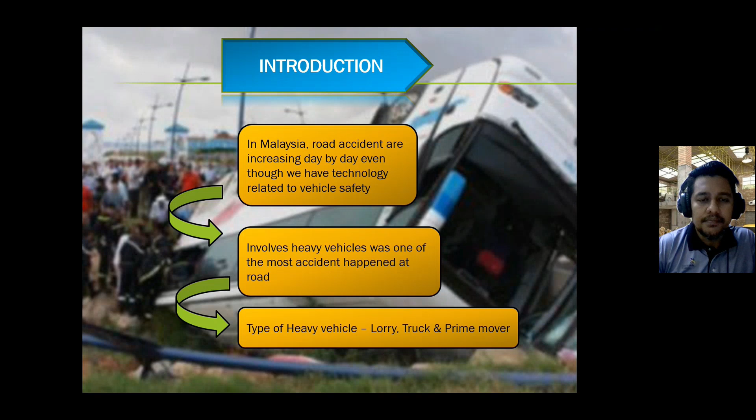This is the statistic, data taken from the Traffic Branch Bukit Aman, showing the total motor vehicles involved in road accidents by type of vehicle in Malaysia from 2007 until 2016. I'm focusing on lorry because lorry is the subject of this research.

Looking at the year 2007, lorries involved in road accidents numbered 47,696. In 2008 the number increased to 48,250, and in 2009 the number decreased to 46,724. The number increased again in 2010 to 50,438, and kept increasing to 53,078 in 2011.

But in 2012, the number of lorries involved in accidents dropped to 42,158, then decreased to 39,276 in 2013, continued to decrease to 37,481 in 2014, and still decreased in 2015 to 34,942. By 2016, the number increased to 35,064.

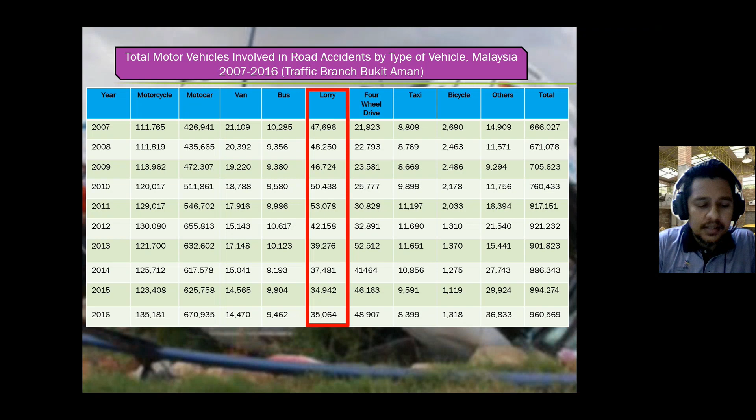This is the data. The data is concerning, and immediate resolution needs to be undertaken.

From Malaysia we go to the worldwide accident report. This source is taken from the University of Michigan Transportation Research Institute and the National Automotive Sample Survey General Estimates System crash database. We look at fatal truck accidents worldwide.

In year 2007, trucks involved in accidents numbered 5,049, with life loss due to the accident at 796. In 2008, trucks involved in accidents numbered 4,352, with life loss of 639. For 2009, trucks involved in accidents numbered 3,450, with life loss of 487. Lastly, in 2010, trucks involved in accidents numbered 3,699, with loss of life at 540.

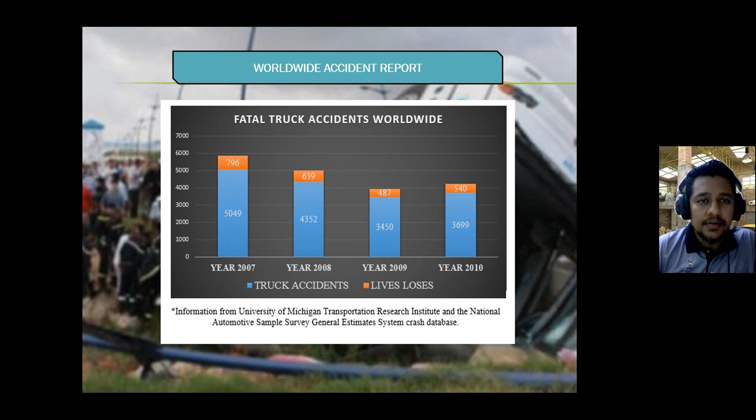This is an example of rollovers that have happened especially in Malaysia. There are four of them, and all of them happened on the highway.

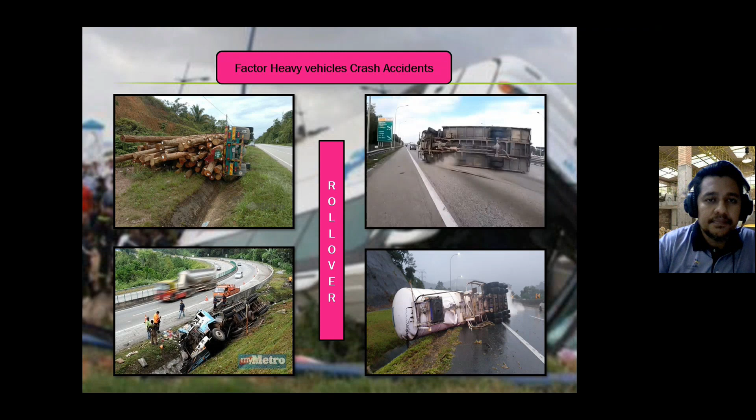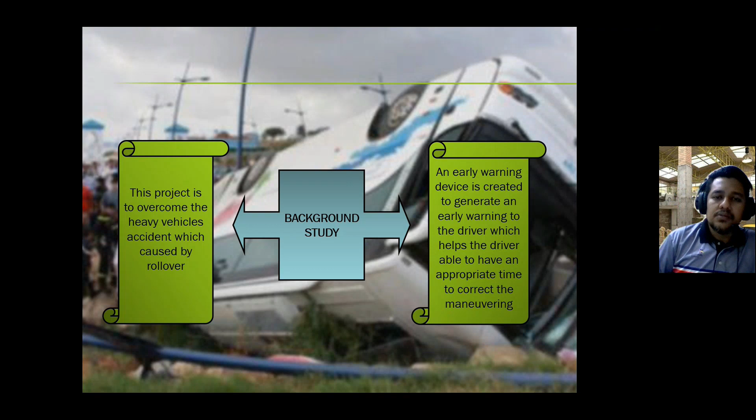The background study: this project is to overcome heavy vehicle accidents caused by rollover. To overcome this, an early warning device is created to generate an early warning to the driver, which helps the driver have an appropriate time to correct the maneuvering.

The problem statement: first we have to know the meaning of rollover. Rollover involves any vehicle rolling over its true longitudinal or lateral axis by 90 degrees or more. Rollover occurs when a vehicle loses control on two wheels and moves to either side. Rollover also occurs when a vehicle collides and flips onto its side or roof.

Still on the problem statement: high vertical profiles such as heavy trucks, SUVs, and buses are at higher risk because this type of vehicle has a high center of gravity. Sudden steering, drastic path changes, or rapid curves at high speed may cause the vehicle's center of gravity to shift to the side and turn over.

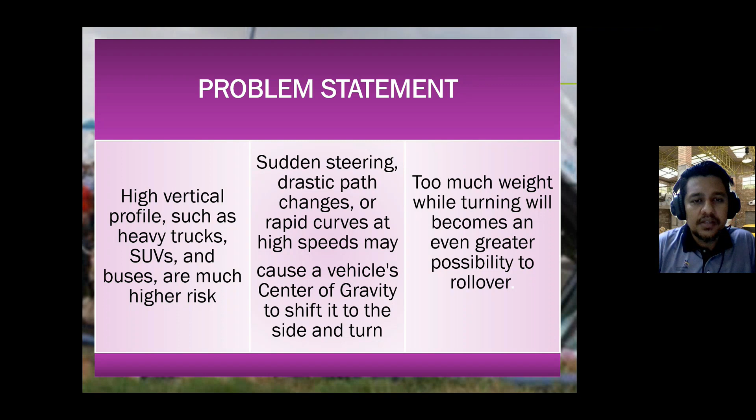Also, too much weight while turning will become an even greater possibility to roll over.

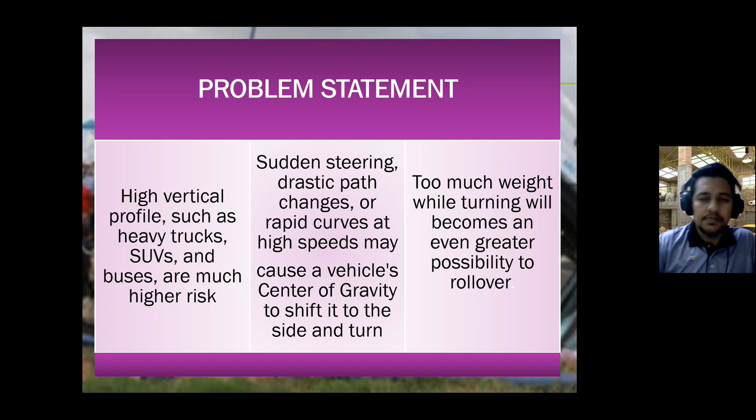The objective of this research is to modify the rollover index algorithm for heavy vehicles, to optimize the parameters of the modified rollover index algorithm for heavy vehicles, and lastly to design and fabricate a rollover warning device for heavy vehicles.

Scope of the research: firstly, a selected rollover index algorithm is modified to improve the performance of the rollover warning system. Secondly, the rollover index algorithm for heavy vehicles is proposed by employing a modified rollover index algorithm with vehicle speed and driver steering input. Thirdly, the rollover index algorithm is developed based on the fastest time response proposed by previous researchers. Lastly, the rollover warning device is designed and fabricated using a microcontroller.

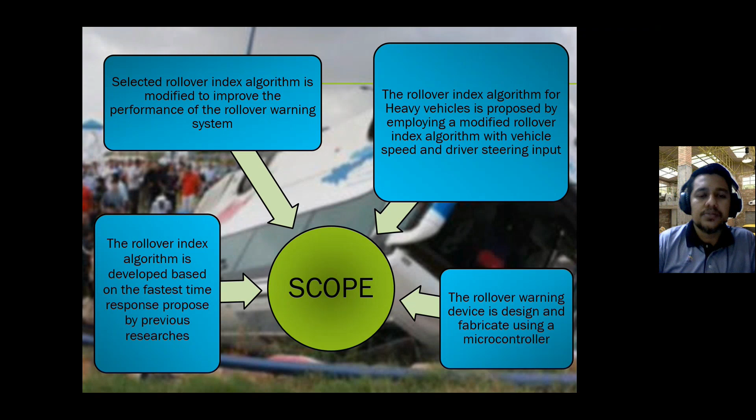There are two limitations. Firstly, the prime mover. The prime mover is government property, located on the premises of the institute, Institut Kemahiran MARA, Jasin Melaka. Test runs are limited due to staff and student safety factors. This is the limitation of the prime mover.

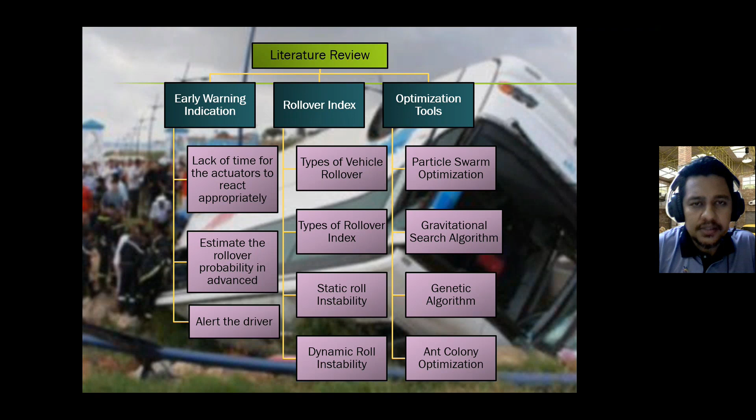Type of vehicle rollover: there are five types, namely turnover, flip over, climb over, end over end, and bounce over.

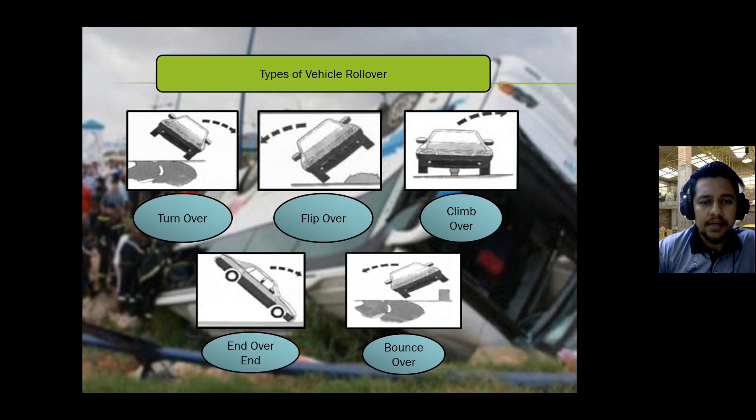Type of rollover index: there are two types, trip and untrip. What is trip and what is untrip?

Trip rollover occurs when a vehicle tire makes contact with an object, causing the vehicle's lateral motion to come to a halt and the vehicle to roll around the obstacle, such as rock, soil, or a ramp—common tripping hazards.

For untrip, it is caused by steering input, velocity, and ground friction. Extreme steering maneuvers like J-hook, quick turn, and quick lane change all play a role in this type of collision.

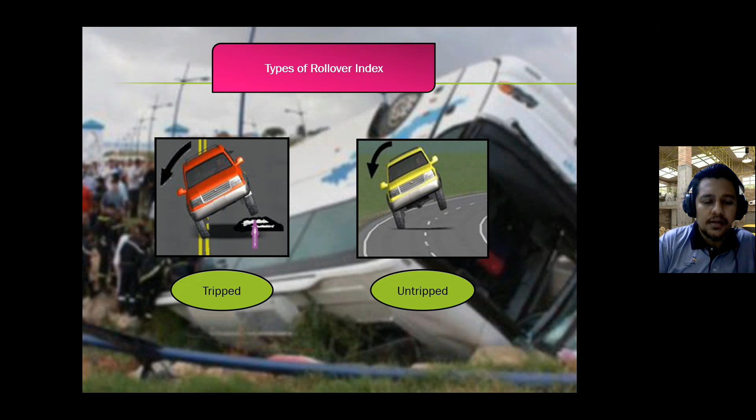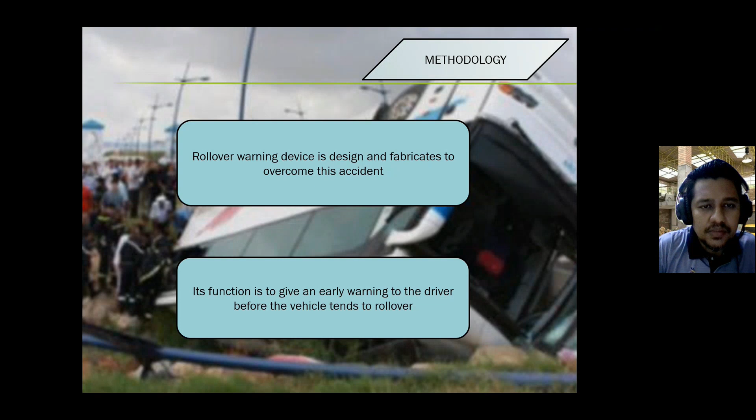Methodology: the rollover warning device is designed and fabricated to overcome this accident. Its function is to give an early warning to the driver before the vehicle tends to roll over.

For the methodology, this is a flowchart and a Gantt chart showing the project flowchart process. Firstly, we start with the literature review to find the information, and from there we evaluate the rollover statement, and after that we modify the rollover index.

From there we optimize, and from the optimization, we evaluate the time response. If no, we have to turn back to optimization and tune the optimization parameter. If yes, we continue with design and fabrication, and from there we make a report writing, and after that the end of the process.

For the Gantt chart, the report writing started in week 1 until week 14. We started with the introduction in week 1 until week 3, the background at week 1 to week 2, the problem statement in week 2, the research objective in week 2 and week 3, the scope of research from week 2 to week 3, and literature review from week 4 until week 12.

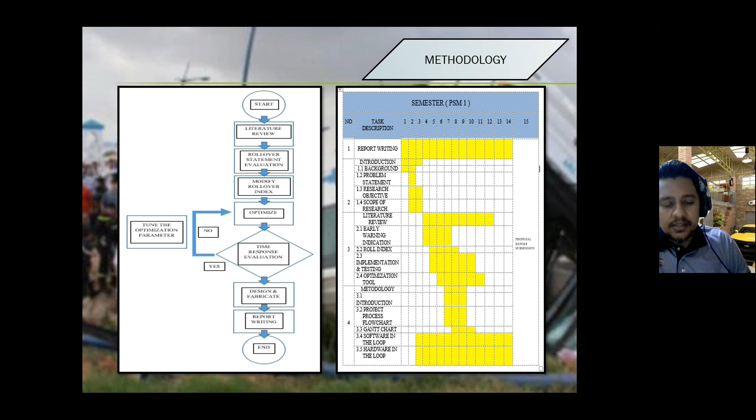Early warning indication from week 4 until week 7. The roll index from week 5 to week 8. Implementation and testing is from week 5 to week 10, and optimization tool is from week 6 until week 11. Methodology week 7 until week 9.

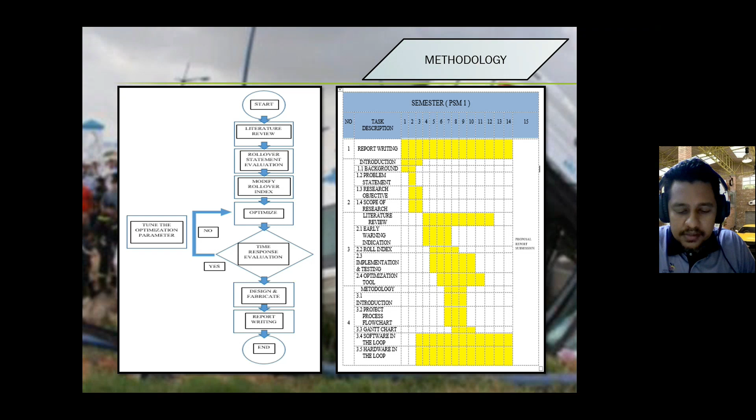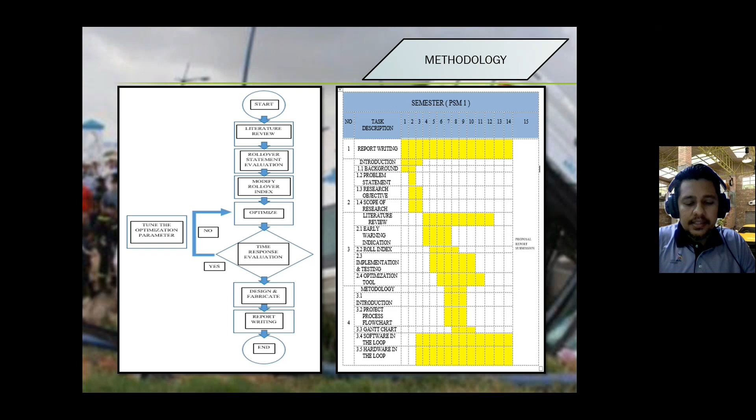Process flowchart from week 7 until week 9. Gantt chart from week 8 until week 11, and lastly the software in the loop, which we call SIL, and hardware in the loop, HIL, started from week 3 until week 14.

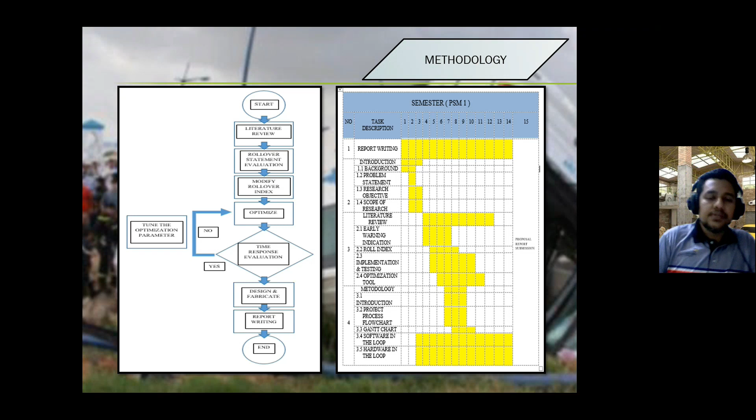So software in the loop, we call it SIL. The algorithm input will be applied to software in the loop using the TruckSim driving simulator. The important data will be included in the simulator, such as vehicle type, speed, and steering angle. This data must be entered into the TruckSim driving simulator software.

Now we move to the second block. This V and also delta will be used as input to the rollover index algorithm. The rollover index algorithm will be used in MATLAB or Simulink software to generate the rollover index value. This value can be used to determine whether the vehicle is prone to rolling over or not.

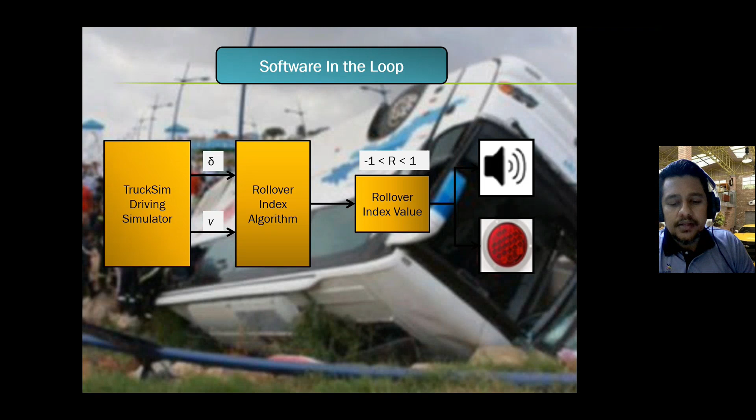When the vehicle is on the verge of rolling over, the index value is greater than one. When the value is higher than one, the vehicle will begin to tip, and it will illuminate and flash as a warning.

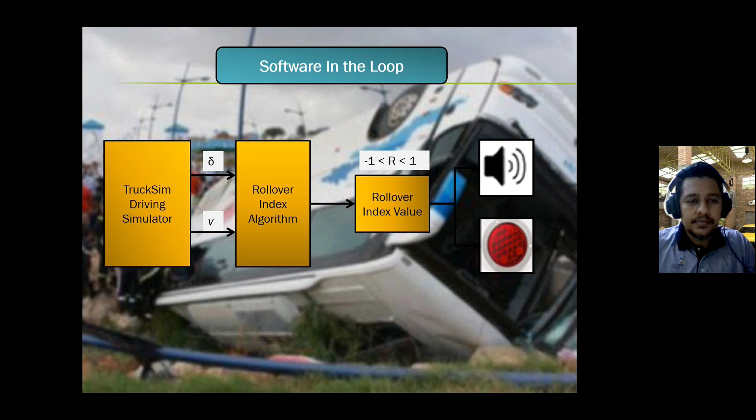This is hardware in the loop, or the short form is HIL. The TruckSim software is used to obtain the real vehicle simulation as well as the output graph, to compare with the output graph of the MATLAB Simulink software.

The PCB product will be put in the steel box. Then we include three toggle switches, with bulb indication for unladen, half laden, and laden. Simultaneously, the LED will illuminate when the velocity and driver steering input meet the requirement set up, for example, when the rollover index crosses the RSF of 0.75.

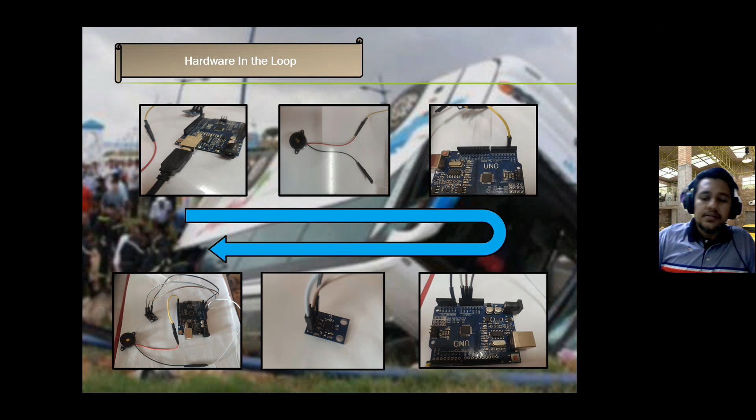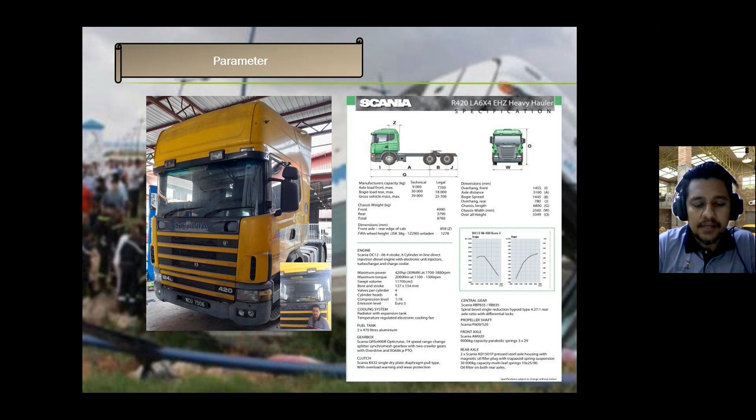For the conclusion, this prime mover is the main vehicle used in transportation and for delivering goods. So my research paper is focused on this type of vehicle, the prime mover, and it is the paper we use to overcome the rollover. That's all for me. Thank you very much.